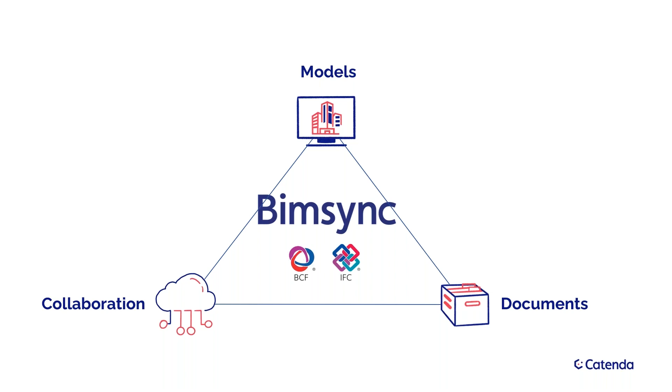Okay, thanks Ben, appreciate it. So Vrex is essentially a continuation of what you're seeing there with Bimsync. In Bimsync, you can view the 3D building information models all consolidated together, and you can find and track issues. Vrex basically takes that one step further in allowing all of the project stakeholders to essentially become immersed in a life-size digital environment of their projects using virtual reality.

So essentially, like what I like to tell people is, if an owner is doing a walkthrough with the architect or the contractor of their building after it's been built, essentially before construction starts, you can actually go through and do that digital walkthrough and approve and verify the design if you're the owner, and then the design team can actually coordinate together in a life-size environment. And what's amazing is when you're in a life-size environment, you can actually see that today when we demonstrate it here in a few moments.

But when you're in a life-size environment and you're seeing things at full scale and you're immersed, you just catch things and experience the design in a different way than just looking at building information models on a 2D screen alone. And so what's really great is that it's easy to use, it's easy to understand and see exactly what things are going to be like, and find issues and make decisions before construction even starts.

So I like to tell people that half of the value is actually being in virtual reality and being in a life-size environment, but the other half of the value is actually this multi-user part. So what you're going to see today is that multiple people are going to be in the VR session, and we're all actually in different locations.

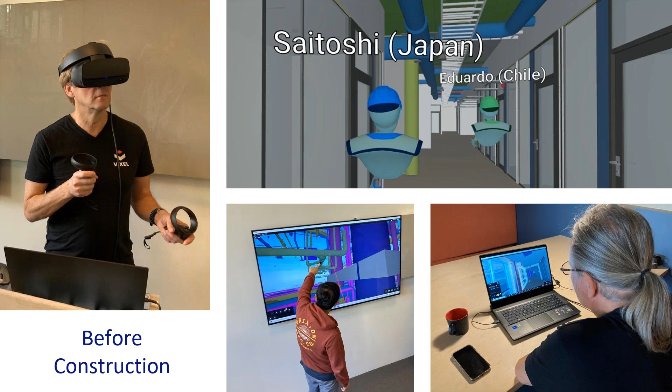I'm here in the US, and then Ben, and then I've got another colleague, Hans, who's going to be in Europe, and we're going to be all at the same time talking and collaborating. So what's great is not only am I walking through in VR, but I'm actually able to talk and point out together and essentially meet as if we're out on the job site, a digital version of that, even before construction starts.

Then once construction actually does begin, what's great is with Vrex, we can take the as-built conditions of point cloud scans from the field, and bring those into a virtual reality environment and overlay them with the building information models. So for instance, in some of the images, you can see when there are field deviations and differences out on site, and compare those against what's actually going on with the original design and the 3D models.

I've been on a lot of projects where it's been very frustrating and confusing trying to explain field deviations and field conditions through RFIs and normal written processes and pictures and snapshots, and then trying to convey that back to the design team and the owner. When you can bring the point clouds back with the 3D building information models together, get everybody in a multi-user VR session, it's much easier to collaborate, see exactly what the condition is, and then make decisions.

So what I'm going to do now is pass it back over to Ben, and he's going to first do a little bit of a live demonstration in Bimsync. Then we're going to hop over into VR, and we will finish up with some questions at the end.

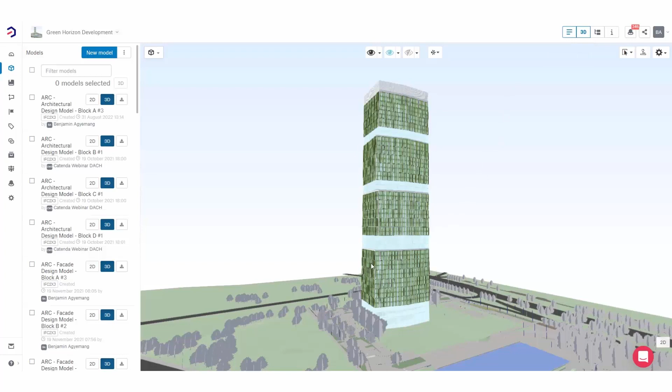So from the model side, if I just turn on the 3D viewer, we can see that on Bimsync, each engineer or each sub has uploaded their discipline models, and all of these come together here to form a federated model that is made up of different disciplines, and all project participants can then just quickly get into this project.

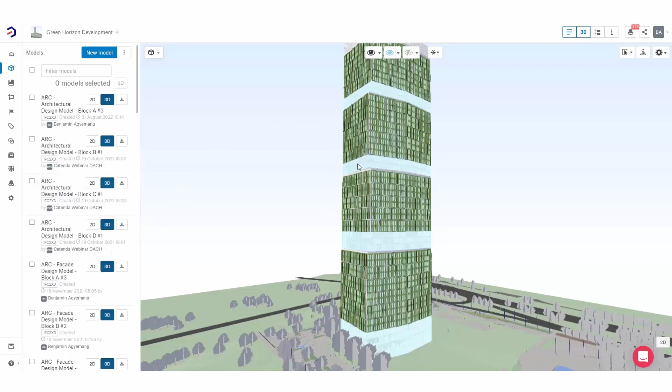So here, as I said, we have a project, a skyscraper project. You can see it's fairly detailed, fairly big. And then if I go a step further, we have the different issues that we're going to be looking at. So we have here on Bimsync already created some issues, some coming out of Solibri, some coming out directly from Bimsync, and some were also created in Vrex.

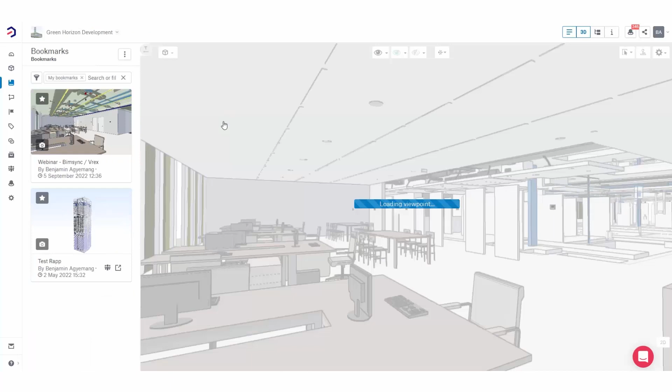So let me use the bookmark to home into the area that we're going to be taking a deeper look at. Before I do this, a quick explanation or example of how a typical workflow could look like. So you have the designing part taking place, then the designers are going to be delivering stuff, and then there's going to be a collaboration taking place.

So you're actually going to be collaborating with different disciplines, different engineers to give you a model that is holistic and also coordinated. Let's say different engineers are working in different authoring software, for example Revit, Archicad, Allplan, whatever the case may be. They design and deliver IFC models onto Bimsync.

From the moment that they deliver this data to Bimsync, everyone in the project is able to view this. So everybody's going to be viewing it and using it to do different tasks. The BIM manager maybe will go and say, okay, let me start doing my clash detection.

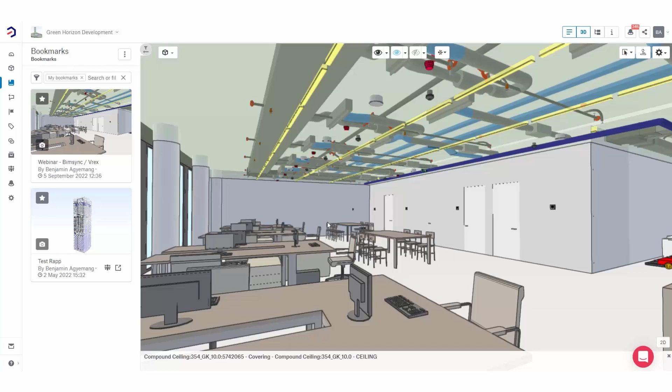He will do his clash detection and have the results as BCF files, which will also be connected or uploaded directly onto Bimsync. And this is where it gets interesting, because the coordination meeting is where the different parties actually come together.

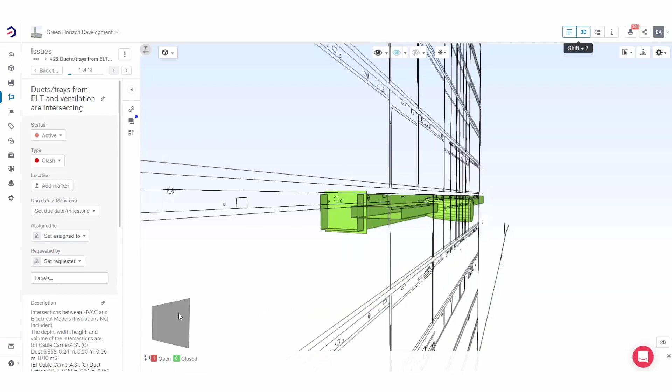This time around we are going to be meeting virtually in the model, in the building, and looking at the different issues that have been created. Let's have a look at the issues we're going to be looking at. These are some issues that were created from Solibri. If I click on this, it takes me to this issue in the model. Let me just delete this clipping plane.

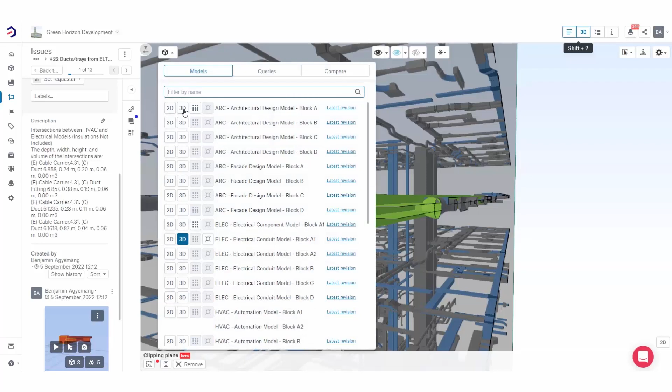So now I'm actually in the model. If I click on this again, it will take me directly to this spot. If I want to see more, I would add a clipping plane here, turn on the rest of the objects, or turn on more models. Let's say we want to see the architectural model to understand more what's going on and where this is actually happening. We have created some example issues, so we don't need to create all of these in the project.

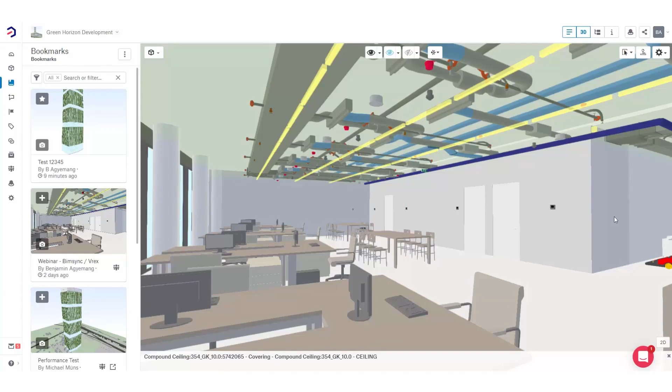But what I will still do is create a quick issue. So now let's find a quick issue to report. I'm just going to create a section here, cut through, and already I'm seeing that there's a collision with the sprinkler pipe and the ventilation duct here at the top.

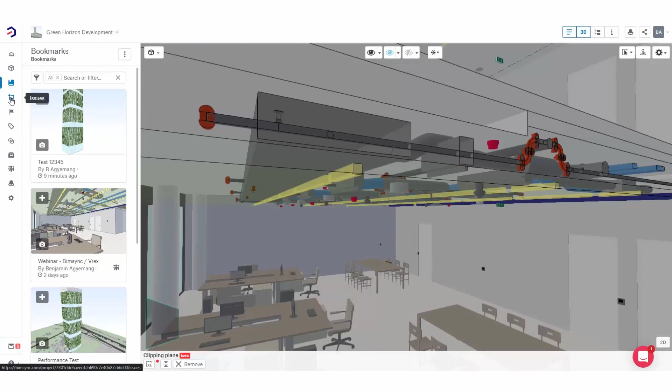So you would just home in on this and create an issue. I'll go over here and say issue, create new issue, and we will call it collision sprinkler and ventilation.

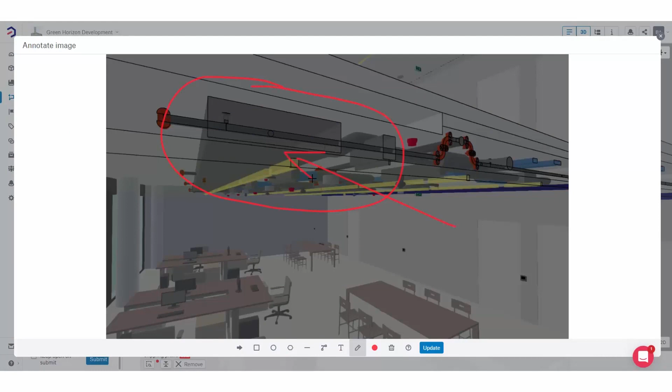Here I could even mark this up better, so I'll make a circle and an arrow so you know where this is taking place. I could assign this to someone in the project, so I will assign this to Chris. And submit. That's it, we have just created an issue in Bimsync.

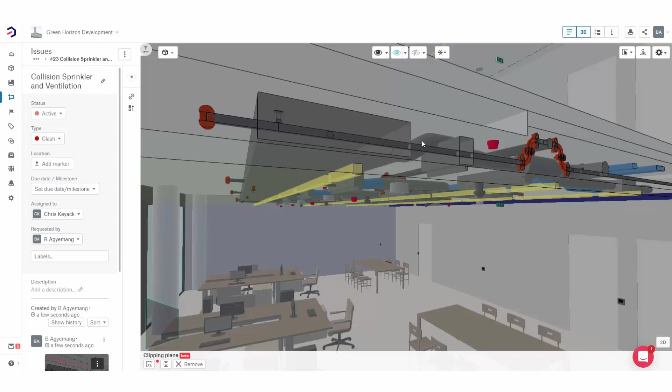Later on, we'll be able to view this also in Vrex. So with this, I will just hand over to Chris for him to prepare the Vrex environment, and then we will all meet up there to have a virtual meeting based on these issues we have created, and we will also be creating issues on the Vrex side.

So now I'm in the virtual building together with Chris and Hans, and we are going to have a look at a couple of issues.

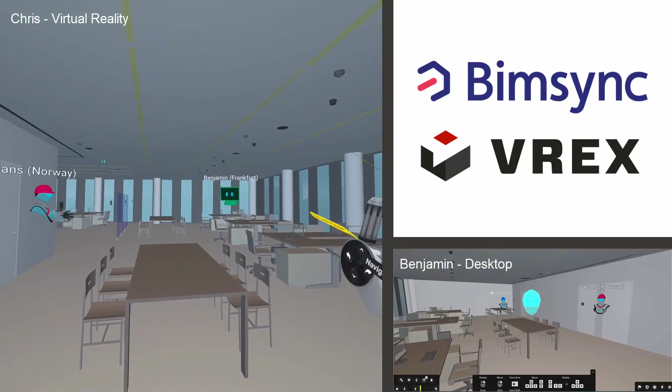Take over, Chris. Hey Benjamin, welcome into the session. Hey Hans, how's it going over there?

Before we get started, the first thing I want to showcase is that Hans is in virtual reality with me, and Benjamin, you're on your desktop. Here inside of VR, from my view, I can see a computer screen icon for your avatar, which distinguishes that you're on desktop, whereas Hans is in VR because I can see him moving around.

What's great about being in multi-user virtual reality like this is that not only am I teleported to a life-size version of the project, essentially doing a walkthrough, but I can hear you guys at the same time. So it's kind of like we're just doing an online meeting. But whenever we talk about an issue, like if we point towards this table and we want it to be a little bit larger...

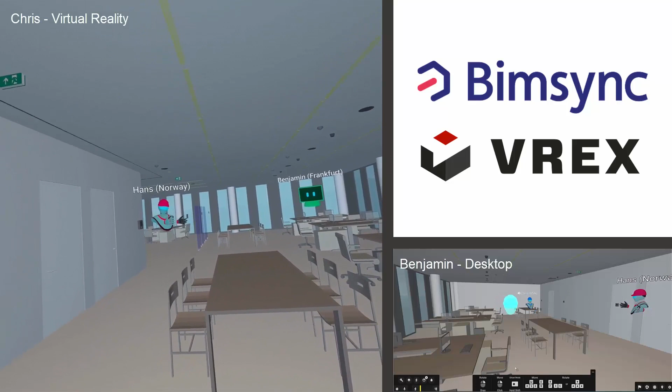I'm actually watching Hans right now investigate these key lock pads that are essentially floating in space, and I can see exactly what he's doing. It almost feels like a live interaction. The only thing missing in this VR environment is that I can't see your eyes, but otherwise, because I can see your hand movements, your gestures, your head nods, and everything like that, you truly get a collaborative experience together.

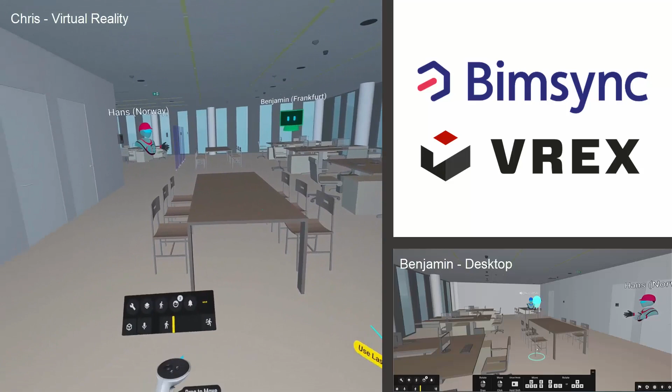So with that being said, you had some issues that you created over in Bimsync, Benjamin, and I'm going to go ahead and go to that issue here real quick. So I'll go to our issue manager. On your side, if you don't mind going ahead and showing on the desktop in Vrex the issue as well - I see there's this collision sprinkler and ventilation.

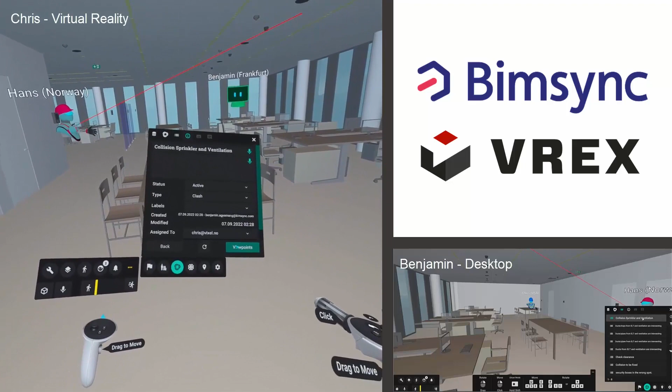So I can go to viewpoints. It'll then show me a thumbnail. And the first thing I can do is say teleport myself there or teleport us all there. So I'm going to go ahead and choose teleport all.

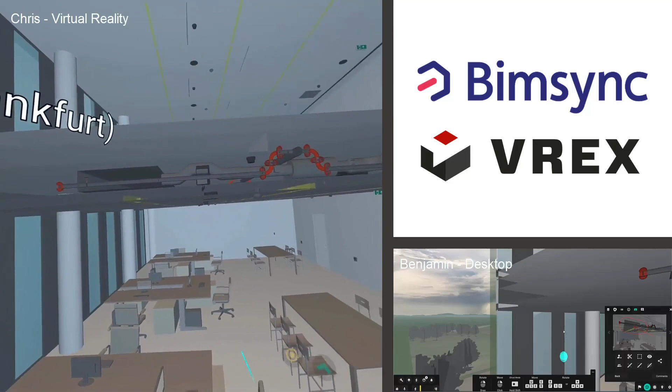We're going to all be kind of stacked on top of each other, brought up to this specific location. Now the next thing I'm going to do is turn on the clipping so it actually clips the model. This gives us good context, just like you had set up, Benjamin, over in Bimsync. If I had any selected objects included, we could see it, or I could clear that. But here, this is great.

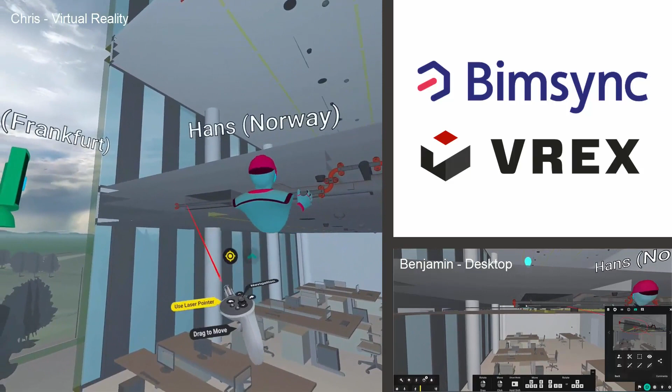In fact, Hans, it's fantastic that you're really up close to it. I can see both of you right now looking at the clash. Using the laser pointer, for instance, I can see right here. Hans, do you see where that sprinkler is going right through the ductwork?

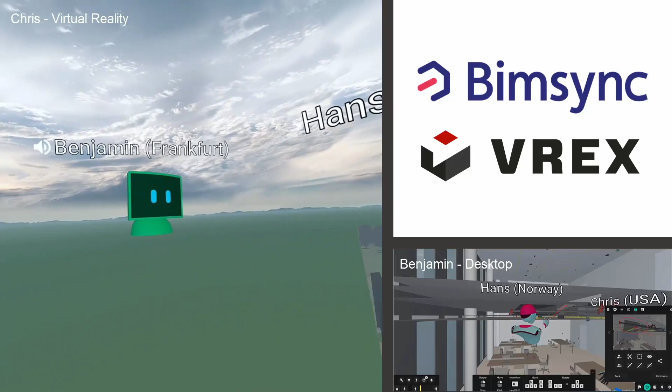Benjamin, this is the issue that you wanted us to look at right here, right? This is clashing through here, correct? Yes, correct. So now it'll be for us to decide what are the next steps to take here, and what are the solutions we could come up with.

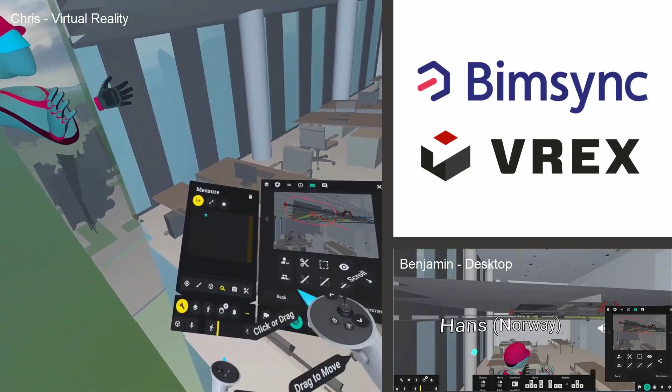Okay, so I'm going to go ahead and just measure. Let me go to the measurement tool, and we'll measure from the ceiling to the floor. So it looks like this is about a 3 meter ceiling and clear space height. I guess right now it looks pretty tight here from the structural slab of the floor above to the ceiling level. So it doesn't look like we have a ton of room to reroute.

Maybe we could go underneath. So I'm just going to go ahead and do a red line. We can see that this is actually kind of trying to go through here, but maybe I'll just show another routing underneath, or maybe this will just go all the way across.

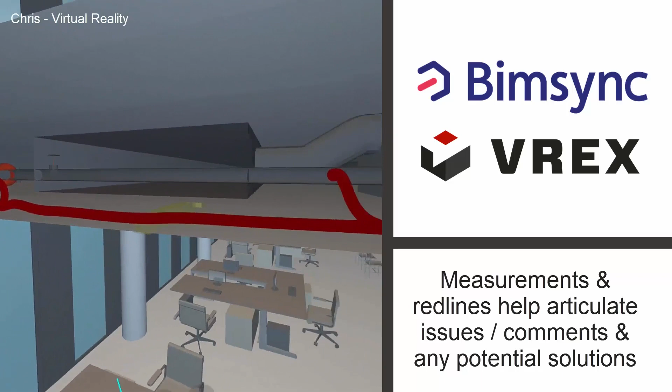So essentially I've got the measurement here, I've got a red line of a proposed solution. And then what I'm going to do now is just go ahead and take a snapshot and add a comment to this existing issue.

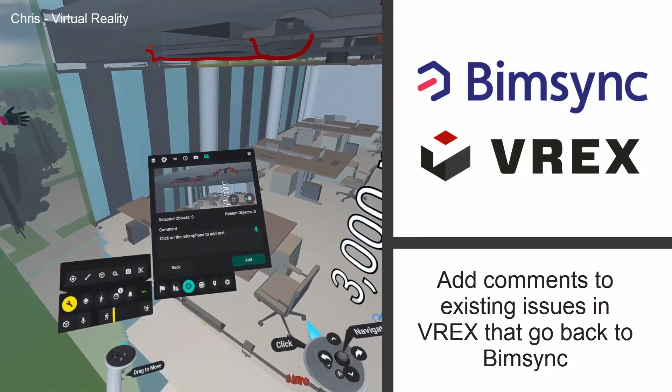Let's try to route this underneath the air duct. So now I've added that comment, and that's going to automatically synchronize through the cloud back to Bimsync. So, Benjamin, when you log in and show back on your desktop in Bimsync, you should see my added comment and snapshot of the red lines we just did.

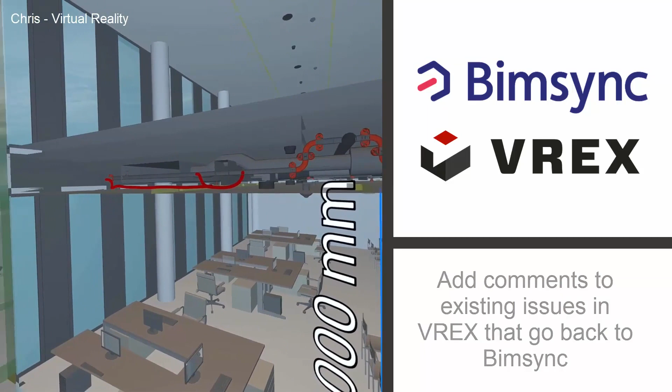So Hans, it looks like you found another issue here. There's some sort of keypads or something floating in space. Benjamin, would you mind hopping on my shoulders and then we can go down and take a look at it together?

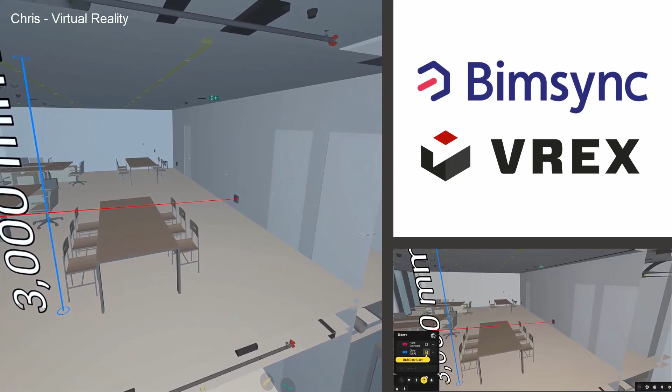Not at all. Let me just click here, and now I'm on your shoulders already. All right, so I'm going to go ahead and zoom on down.

Yeah, so this seems like a temperature regulator that was attached to walls, and things like this usually happen when you copy a floor to the next. So I would assume the other floor had cubicles, so they haven't made the necessary changes yet for the open space layout.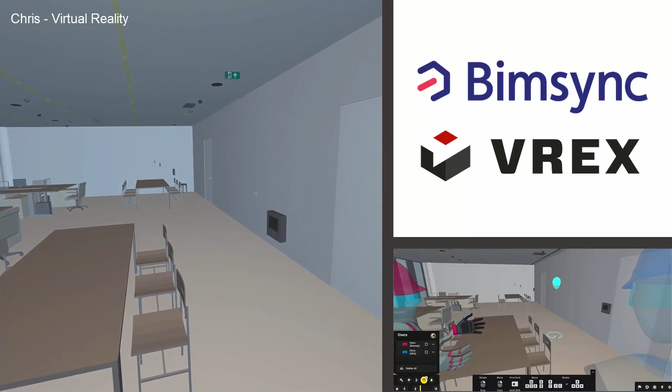So Chris, you could go ahead and make an issue out of that. Okay, all right, so I'm going to go ahead and go to red lines here real quick, and I'll just draw here that we want to remove these. Then I'll just go over to our issue creation.

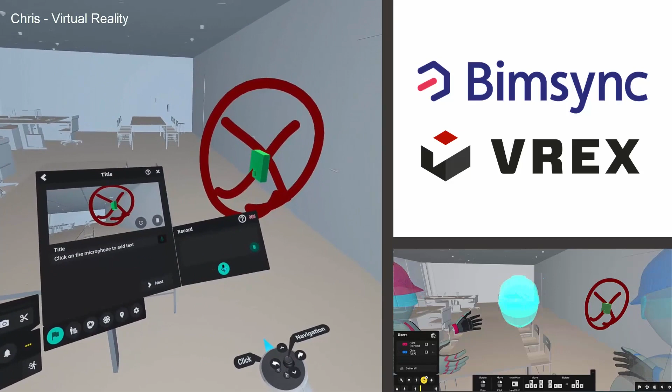I'll just take a picture for the thumbnail. You can actually select objects as well. Remove temperature boxes. So here you can see the text or the voice to text recognition, and then I could put a deeper description if I need to.

I'll just say next. We can then set basically the status, the type of issue that this is. Really, this is probably just a warning, so we'll say warning, say next, and then I'm going to go ahead and save this. When I press save, it's going to automatically synchronize through the cloud over into Bimsync.

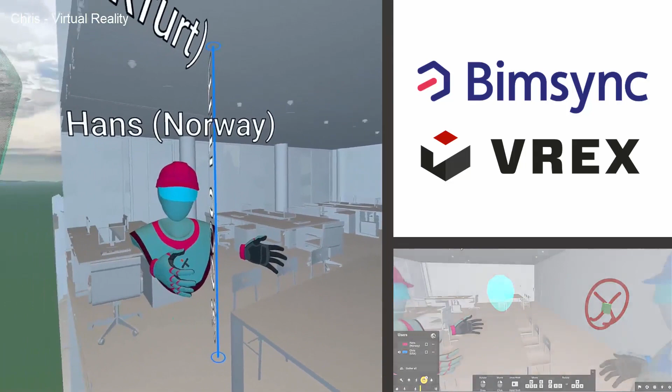And now that we've added the comments here and essentially created this new issue, Benjamin, why don't you go ahead and take over on your desktop, and let's look at this issue over in Bimsync. Perfect. Thanks, Chris.

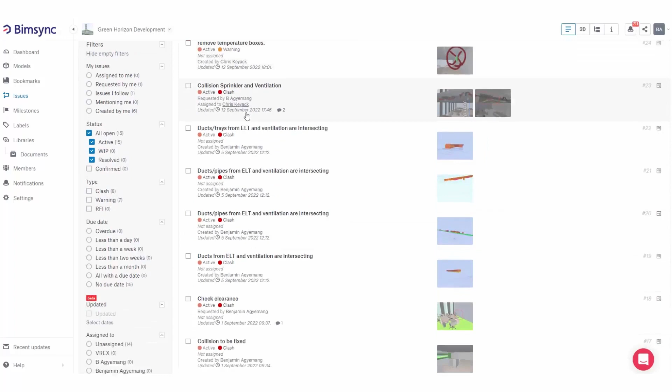So here we are back in Bimsync. As we can see, the previous issues and the issue that Chris just created. Let's have a look at the one that Chris commented on.

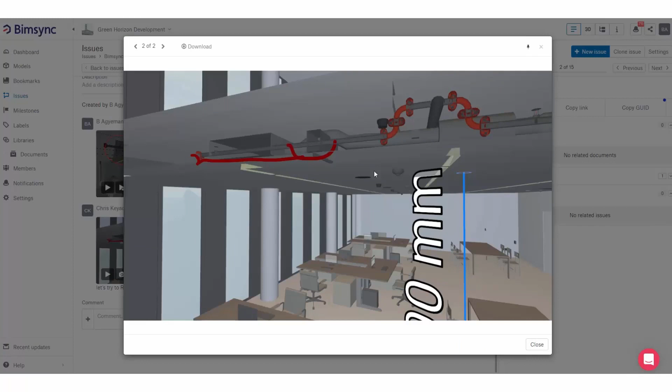This was the issue with the sprinkler pipe colliding with the ventilation duct, and here we see the suggestion from Chris. We could actually go back and view this in Bimsync. Let's wait for the models to load.

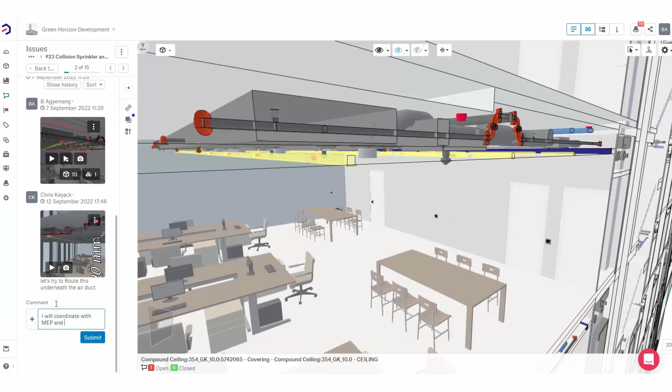Right, so here we have it, and here's the screenshot. We could even go now and add a comment to say, I will coordinate with MEP and structure. Submit. Now let's go back to the issues and have a look at the temperature boxes.

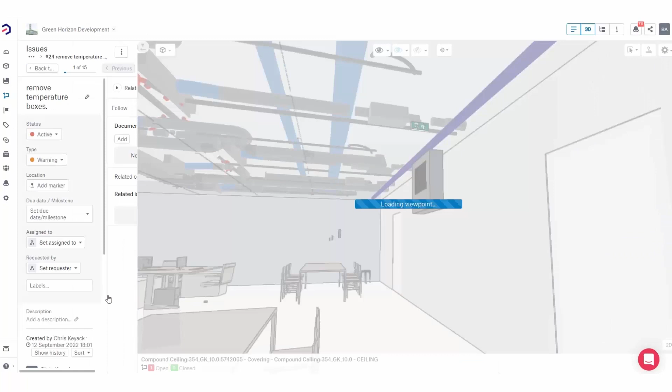So here we have the screenshot, the markup that Chris did in VREX. If I press play, it will take us now exactly to this point. I can have a look at this, and I see here there's a whole line of temperature boxes that needs to be removed or get placed somewhere else.

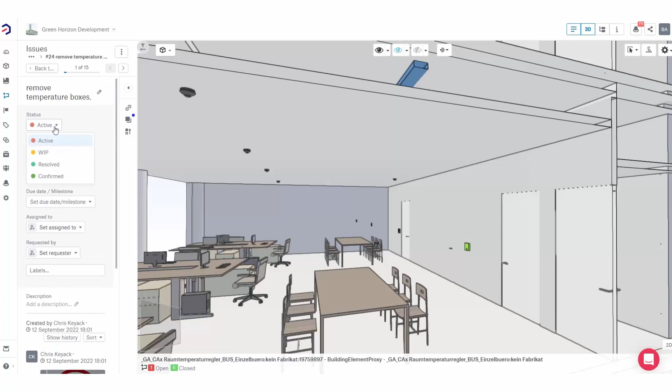So I could go to this issue and say work in progress, and I'll just put a quick comment: I will inform the electrical guy. So yeah, that's it from Bimsync.

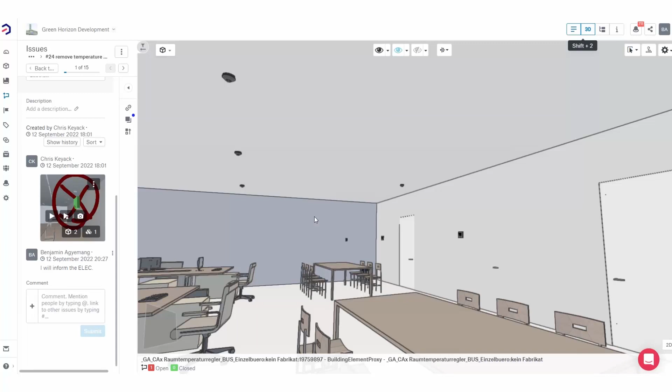Let's wrap up and get ready for the Q&A session. Thank you, Chris and Benjamin and Hans for this demonstration in Bimsync and in Vrex. We received some questions from the participants, so I will start with a question from Steve.

How is the cloud connection made? It means 4G, Wi-Fi, or something else?

I assume this question is related to the VR side. Basically what happens is in Vrex, for the live meeting, it just goes through your normal internet path, and we're just managing the users, kind of like what you would do on a normal online meeting session. You log into your session, there's a meeting room in Vrex that you can set up, and those meeting rooms are associated to projects. Then we have a desktop application that you install on your PC, and everybody just logs into their account or a guest room code. They log into the session, and then the Vrex application manages that through our hosted services out in the cloud. So it feels a lot like how you would join a normal online meeting.